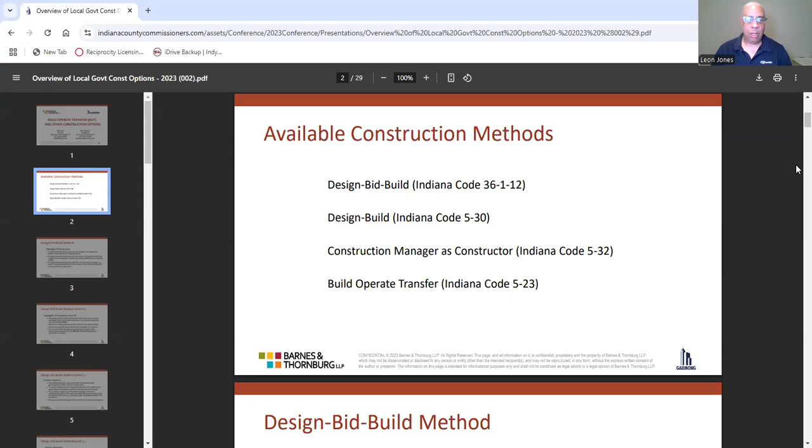And in this PowerPoint, we're going to deal with build, operate, and transfer, known as BOT, and other construction options. Now, available methods of construction, again, I just mentioned them before. We have design-build, design-bid-build, construction manager as constructor, which would be the prime contractor. And then we have what we call BOT, build, operate, and transfer. And these are all under the Indiana codes.

Now, under the design-bid-build method, here are the highlights. Basically, the governmental entity must hire an architect or engineer to prepare detailed plans and specifications. The governmental entity may not have plans and specifications that unduly limit competition, which may make it difficult to pre-qualify bidders. The governmental agency may also hire a construction manager and owner's representative of the works or the architect engineer to supervise the construction.

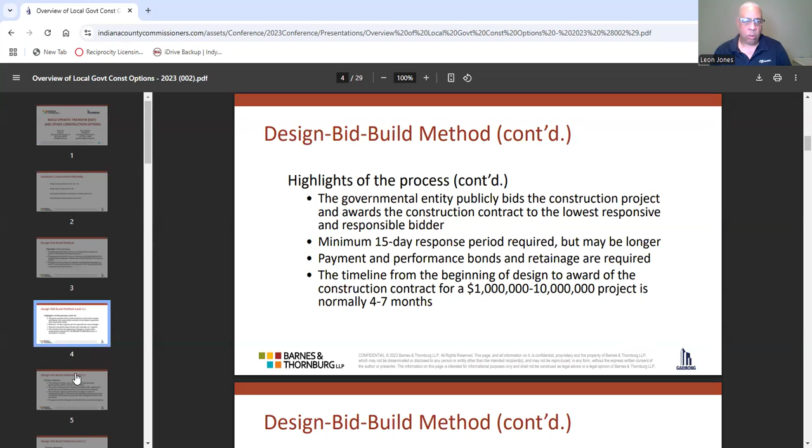Also, the governmental entity publicly bids the construction project and awards the construction contract to the lowest responsive and responsible bidder. A minimum 15-day response period is required, but may be longer. Payment and performance bonds and retainage are required. So basically the timeline from the beginning of design to award of the construction contract for projects from $1 million to $10 million is normally 4 to 7 months.

And here are the positives. The method has been used often by local and state governmental entities, and it has a long history. Public bidding ensures the governmental entity is getting the lowest bid by the bidding market on the day bids are received. The architect, engineer, construction manager, or owner's representative of the works provides the governmental entity an objective third party to review the work being performed by the contractor. Also, the governmental entity gets the benefit of any unused contingency.

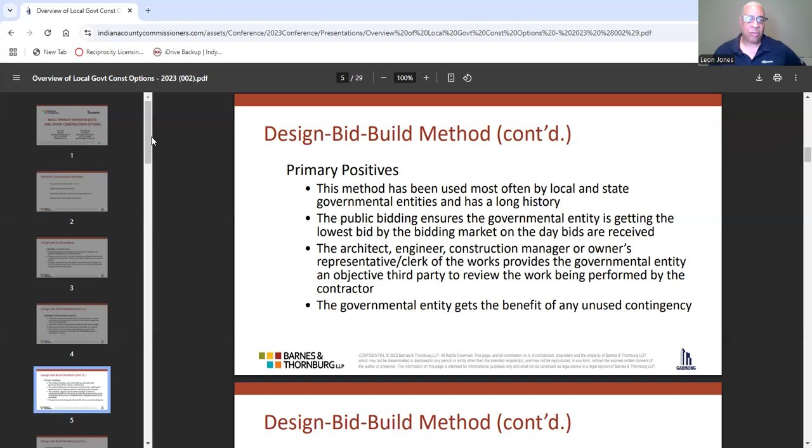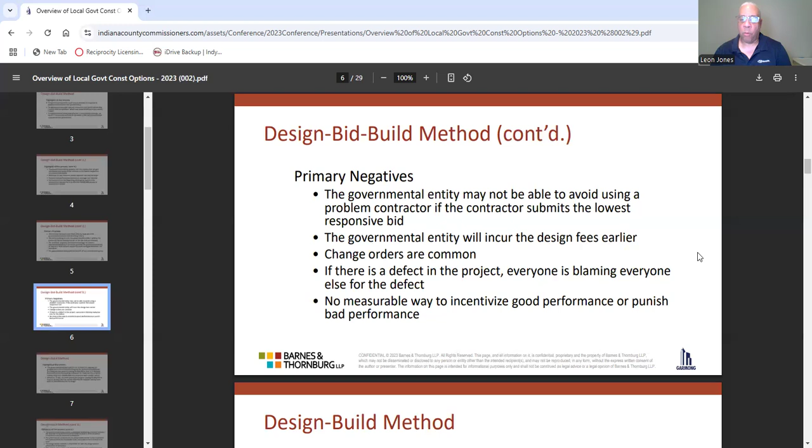Now, here are the negatives. We're on design-bid-build right now. The governmental entity may not be able to avoid using a problem contractor if the contractor submits the lowest responsive bid. The governmental entity will incur the design fees earlier. Change orders are often common. And if there is a defect in a project, everyone is blaming everyone else for the defect. So there's no measurable way to incentivize good performance or punish bad performance.

Now, here is the design-build method. The governmental entity must hire an architect or engineer to prepare and issue a combined request for qualifications, known as an RFQ, or an RFP, which is a request for proposals, for projects costing $5 million or less, or a request for qualifications followed by a request for proposals for projects costing more than $5 million, in accordance with a public notice.

So basically, you have a minimum 37-day response period for projects costing $5 million or less, or a 15-day response period required for projects costing more than $5 million, but it can be longer.

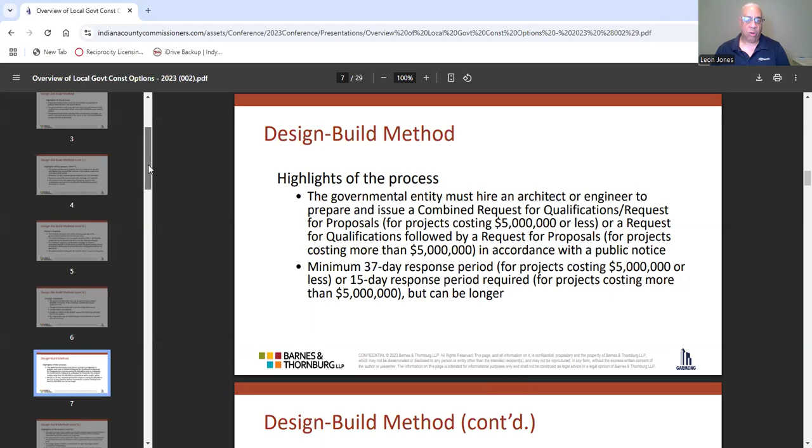Now, the governmental entity creates a committee containing a licensed architect and engineer, along with others, that scores all aspects of the responses submitted except the sealed price proposals. So basically, the government entity awards the design build contract to the respondent that provides the best value based on a respondent's score relative to its price.

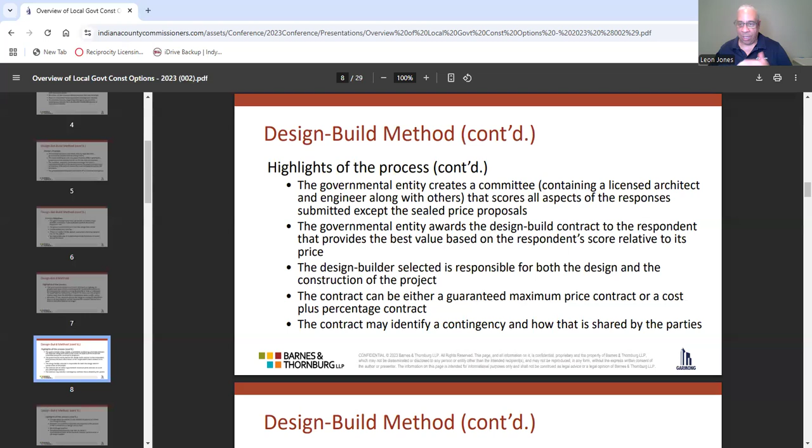Then the design builder selected is responsible for both the design and the construction of the project. Now, the contract can be either a guaranteed maximum price contract or a cost plus percentage contract. Also, the contract may identify a contingency and how that is shared by the parties. Also, with this method, change orders are permitted in only limited situations or if there is a change in scope.

Also, payment and performance bonds are required in the amount of the contract minus design service fees. There is no retainage required. Now, what I mean by retainage, basically, when we deal with construction contracts, the contractor may want to get paid for mobilization, the office. So they front load a lot of those activities so they can get paid right away, even when little work has taken place.

Now, basically, when we have retainage, it's 10%. And in order for the contractor to get that 10%, they must turn in the as-builts. That means you have plans based on what the site was like or what it looked like after construction took place. And then if there's some additional infrastructure added, you would see it on the as-built plans.

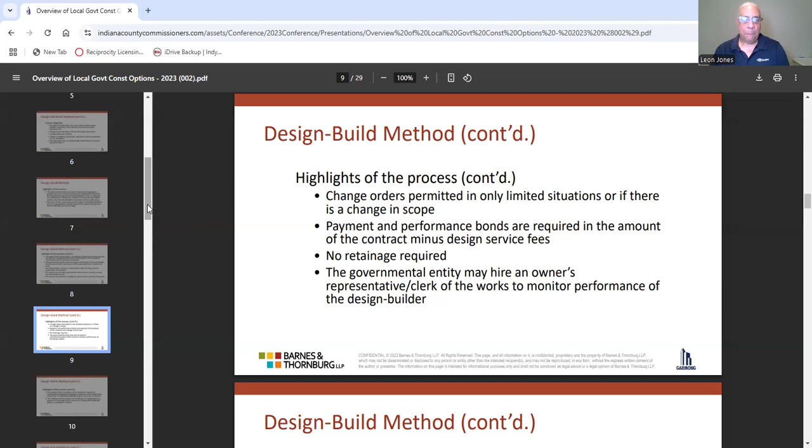Now, again, with the design build method, change orders are permitted in only limited situations or if there is a change in scope. We also have payment and performance bonds that are required in the amount of the contract minus design fees. Again, no retainage required. The government entity may hire an owner's representative, clerk of the works, to monitor the performance of the design builder.

The timeline from the creation of the combined request for qualifications, request for proposals, to approval of the design build contract for a 1 million to 5 million project is normally 3 to 5 months. The timeline from the creation of the request for qualifications to approval of the design build contract for a 5 million to 10 million dollar project is normally 5 to 7 months.

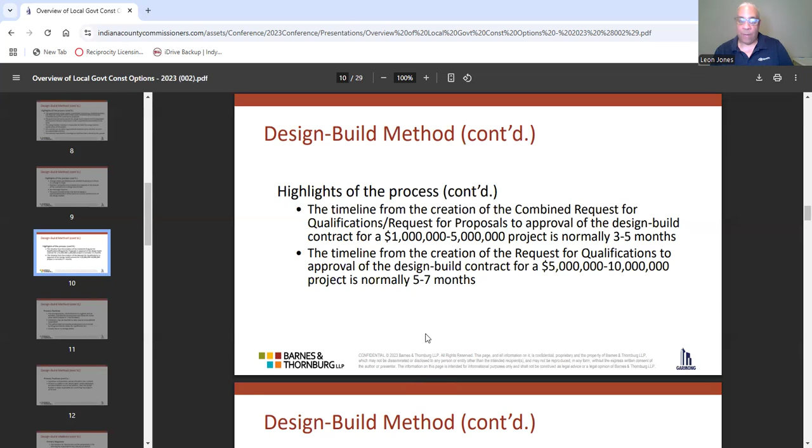Because sometimes low bidders might not be good contractors or good consultants, and they will undercut their competition and they will do a poor job. Some of them may not even be qualified to do the work, although they might say they're qualified. But when you look at their performance, no, they're not doing a good job.

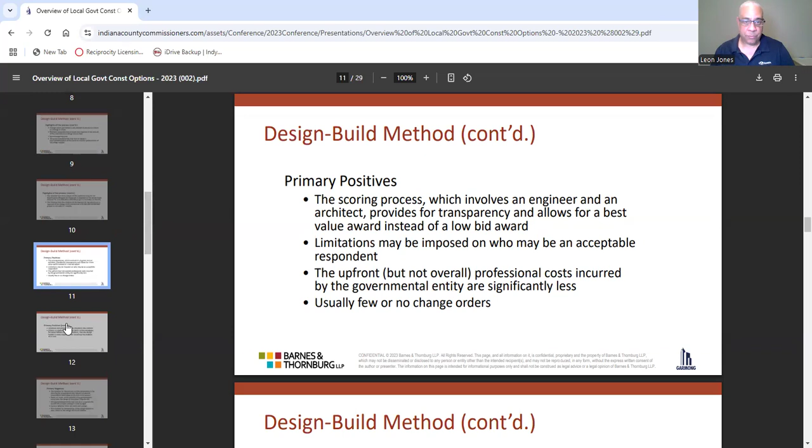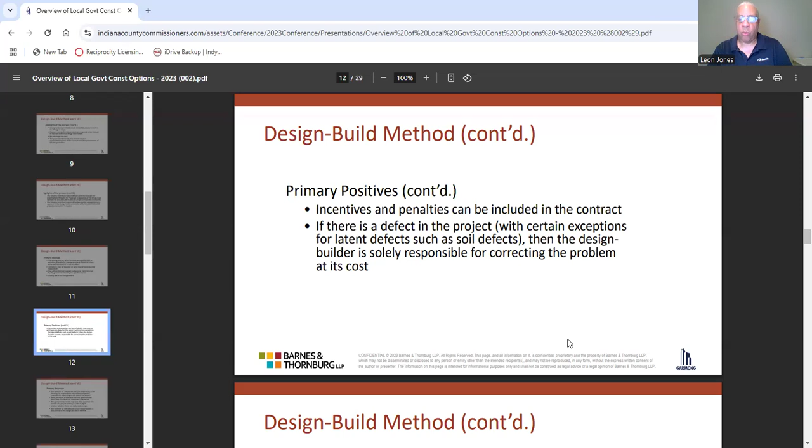Now, the incentives and penalties can be included in the contract. So if there is a defect in the project, with certain exceptions for latent defects, such as soil defects, then the design builder is solely responsible for correcting the problem at its cost.

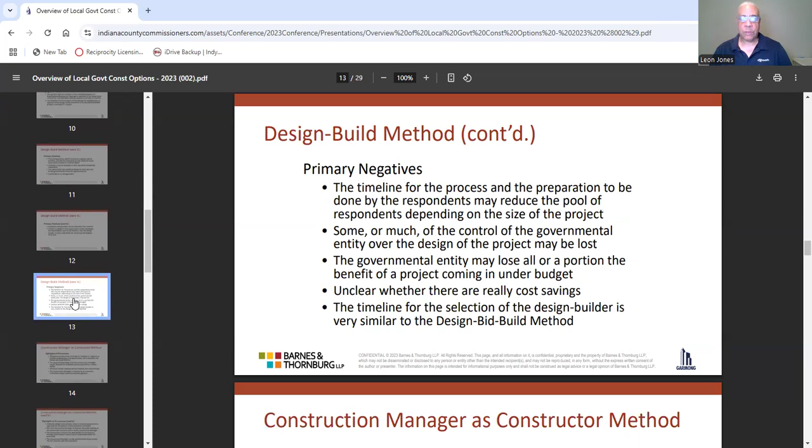Now, when we deal with the construction manager as constructor method, the governmental entity must hire an architect or engineer to prepare detailed plans and specifications like it would for the design bid build method. The governmental entity hires the construction manager using a request for proposals process pursuant to a public notice. A minimum 15-day response period is required, but may be longer. And also the construction manager is selected by an evaluation committee subject to governing body approval.

So basically, after the construction manager is selected, the public bidding of the construction contracts occurs by the construction manager. And the construction contracts are awarded by the construction manager to the lowest responsive and responsible bidder for each trade. And the construction manager, not the governmental entity, enters into the contracts with the contractors.

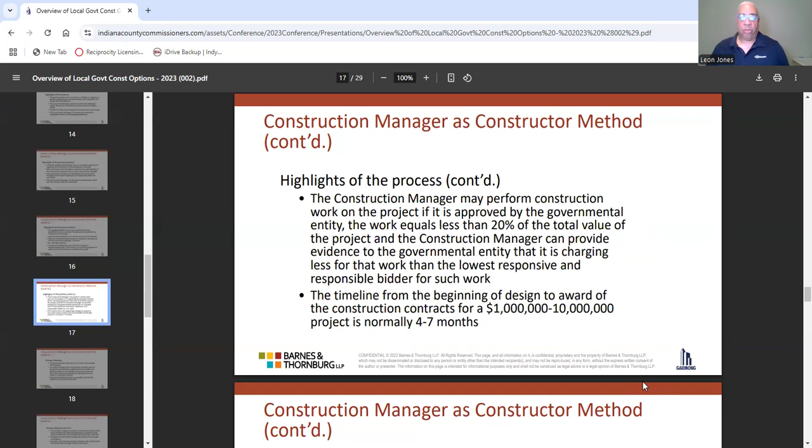Also, the construction manager may perform construction work on the project if it is approved by the governmental entity, the work equals less than 20% of the total value of the project, and the construction manager can provide evidence to the governmental entity that it is charging less for the work than the lowest responsive and responsible bidder for such work. Also, the timeline from the beginning of the design to award of the construction contracts for a $1 million to $10 million project is normally 4 to 7 months.

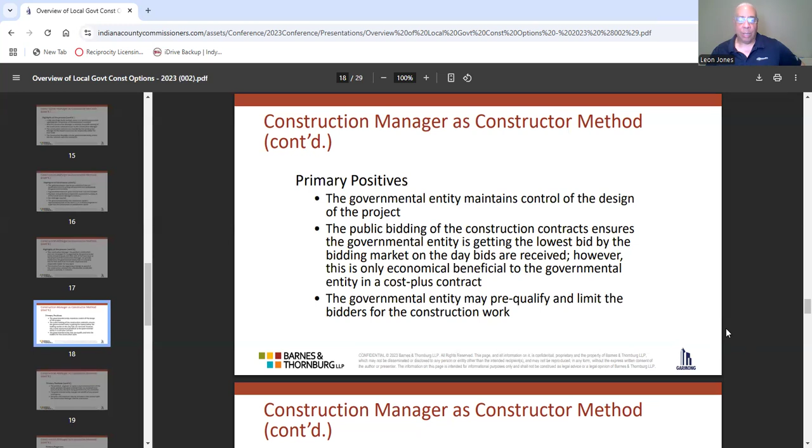And of course, the positives: the governmental entity maintains control of the design of the project. The public bidding of the construction contracts ensures the governmental entity is getting the lowest bid by the bidding market on the day bids are received. However, this is only an economical benefit to the governmental entity in a cost plus contract. Also, the governmental entity may pre-qualify and limit the bidders for the construction work.

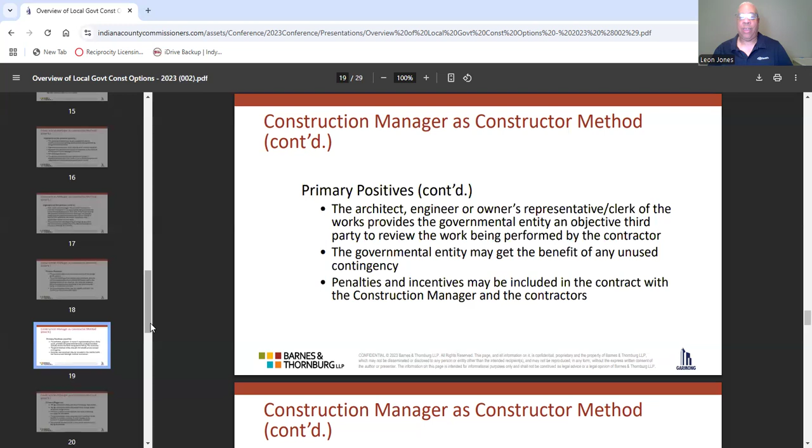Also, the architect, engineer, or owner's representative, clerk of the works provides the governmental entity an objective third party to review the work being performed by the contractor. The governmental entity may get the benefit of any unused contingency. Also, penalties and incentives may be included in the contract with the construction manager and the contractors.

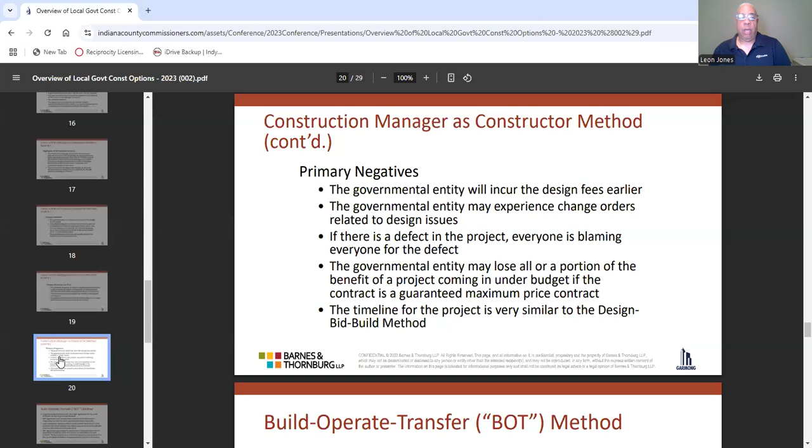Now, here's the method that I heard about for the first time working for the city of Indianapolis. And this is when we get into what we call the BOT method. BOT stands for build, operate, and transfer. Now, here's how it works.

You have a governmental body, and they may enter into a BOT agreement for any public facility for use by the governmental body. So basically, the BOT agreement must identify which costs the developer is responsible for and which costs the governmental body is responsible for as well. And upon completion, the developer or offeror must operate the facility for some period of time before transferring it back to the governmental entity. Basically, 30 days is common. It could be a much longer term.

So here's what we have here. A BOT agreement may provide for the transfer of the public facility to the governmental body by means of a lease or an installment purchase contract. So the lease payments or installment payments may be made from any source legally available to the governmental body for such purpose.

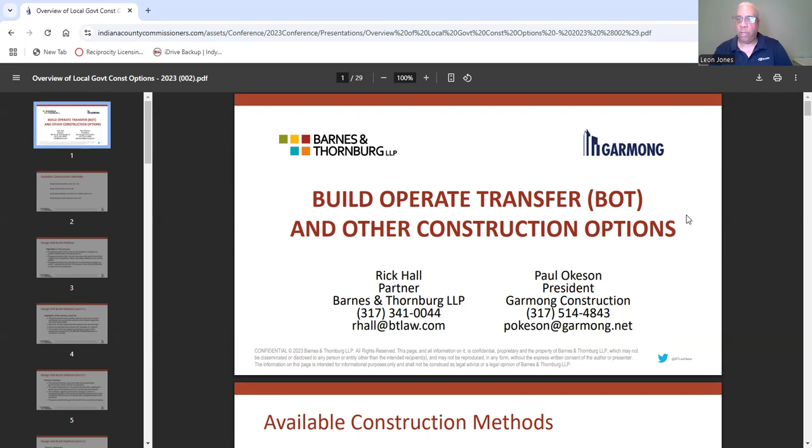But that is the information on build, operate, and transfer.